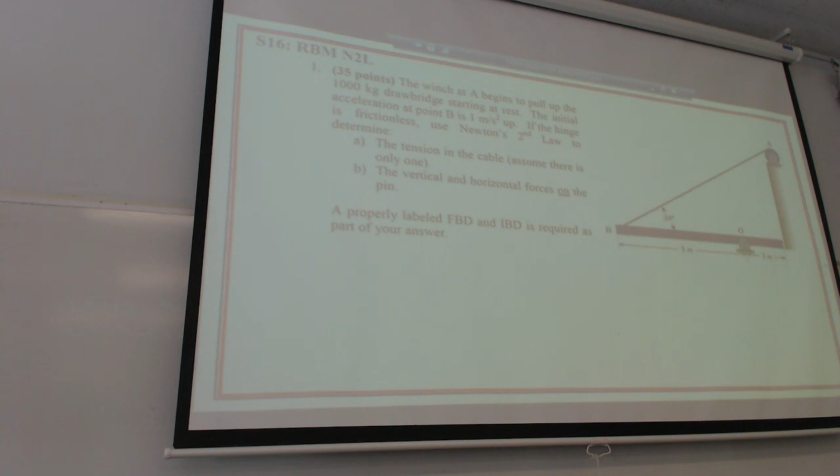So here was from spring of 2016 at Coast Guard Academy. That's a Newton's second law problem. Spring 2017, that was my last year at the Coast Guard Academy. I didn't write this problem, I can tell, because I would have made a prettier picture. Spring 14, that was a long time ago.

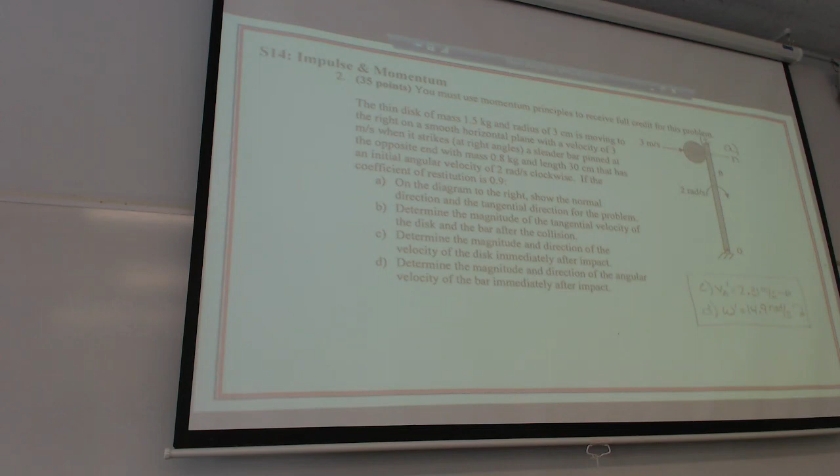Spring 14, okay, so this is a Newton's second law, impulse and momentum. You can tell right there, this is the last topic we just covered, right? Because you have a collision that's happening, and that does look like it might have been me. But not my handwriting, that's Alicia Garcia. This was mine because it was a silly looking thing. There's a work energy problem.

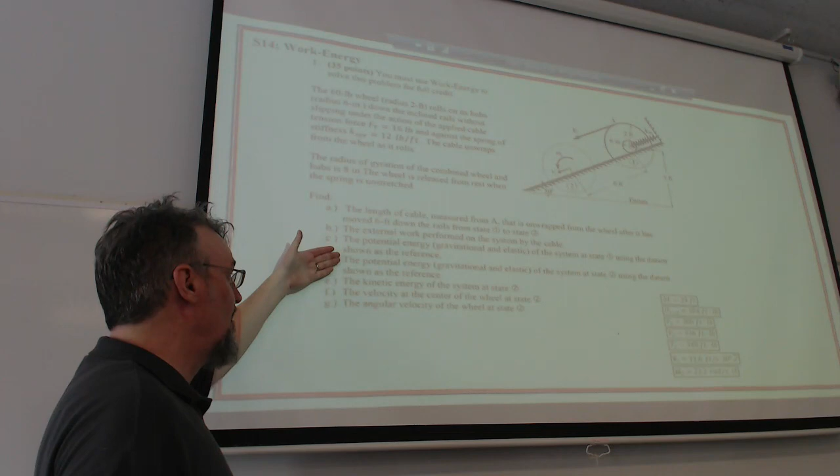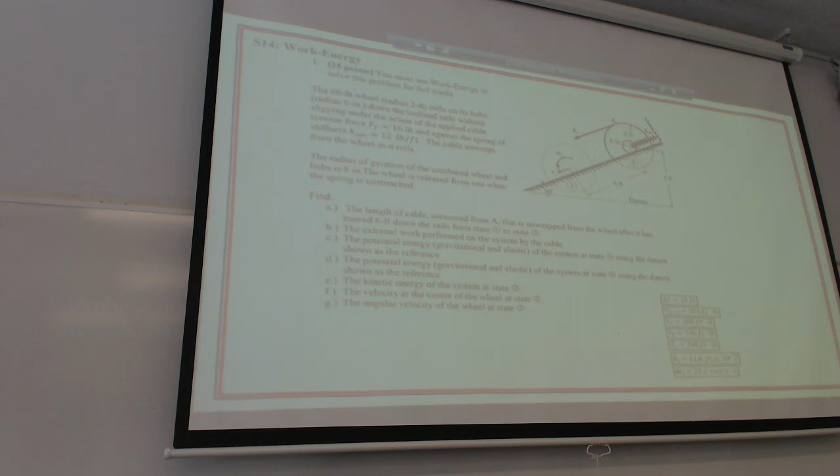I tried to make something complicated. Something I would change, I would no longer do this, but I used to: I asked all of these things to make it easier to grade, because I'd assign a point value to each of those steps. But I don't want you to just have me hold your hand and walk through it. So just keep that in mind when we're looking at this.

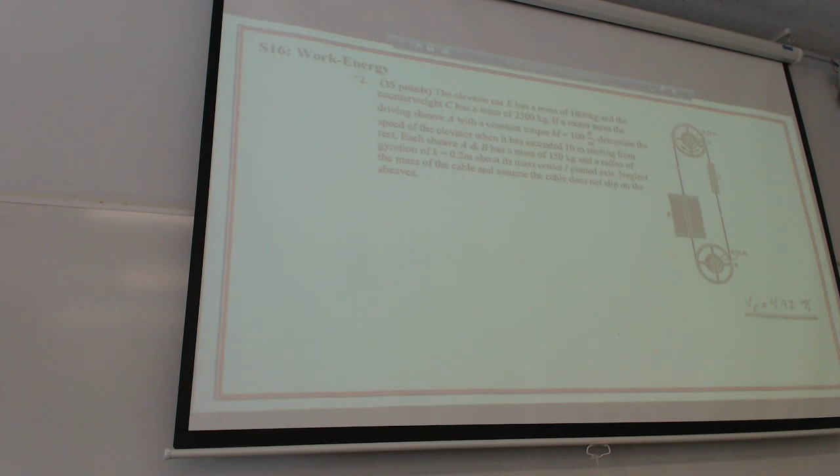My good friend Sean Munnis wrote this problem. It's like an elevator. It was out of a different book. Impulse and momentum. That looks kind of like me, but it's Alicia's handwriting. Work energy. This is definitely me. This is a ballistic pendulum, so this is really close to what we just covered. This is definitely me. So this is really various topics.

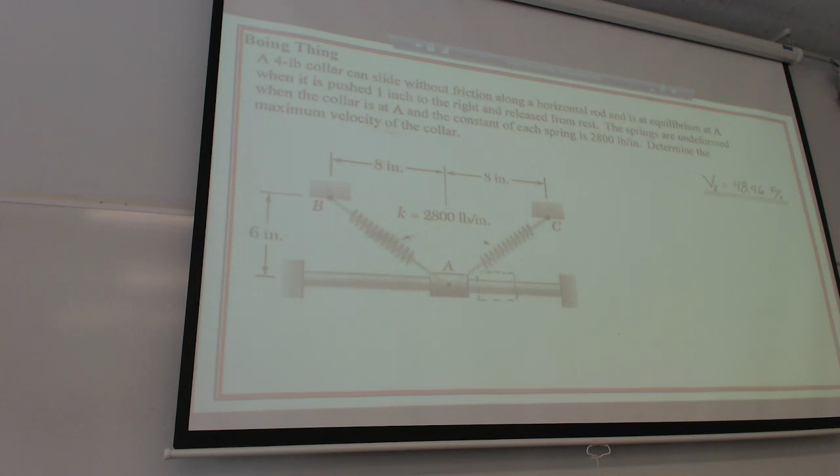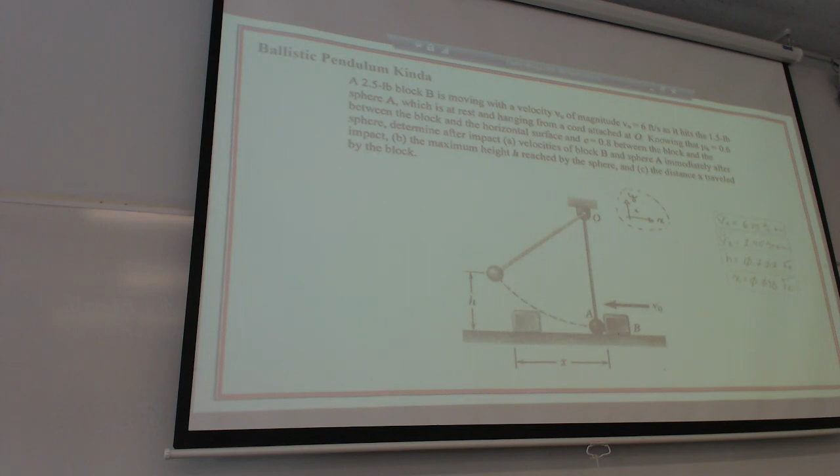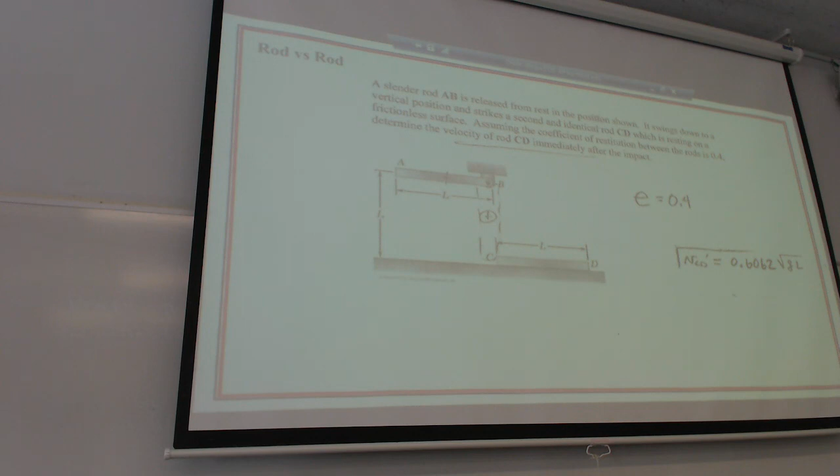There's only so many problems I can ask. So this was trying to get some more of that dependent motion stuff. This is with particles for polar coordinates. Here's a particle for work energy, because you can see the spring. Here's an acceleration problem. Here's a ballistic pendulum kind of problem. A work energy, oh, both Newton's second law and work energy. This is definitely an impulse momentum collision problem.

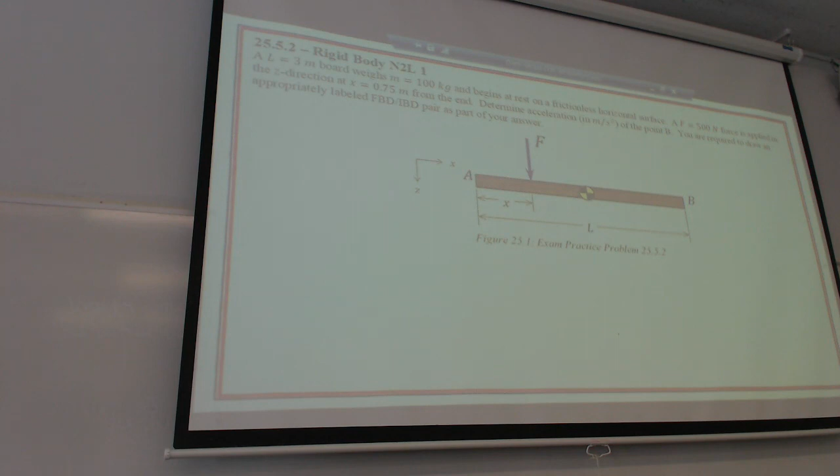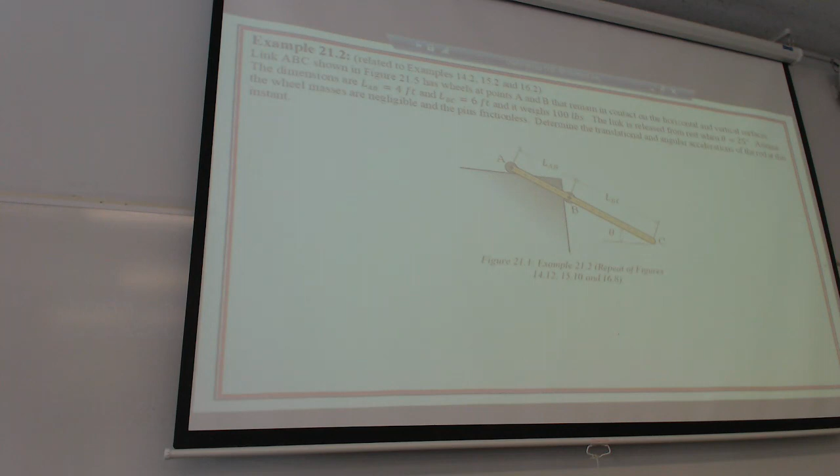This is a good problem because it is simple, but if you can do it, it reveals that you're capable of solving it. It does measure. If you can't do it, it measures that you can't do it. This is not a simple problem, so I probably wouldn't ask it. It involves a bunch more steps. This is also a really long problem. But this is almost identical to an earlier one that we just showed.

It's because it's not going between two different points. You want to do it instantaneous, and you can't do an instantaneous thing with work energy. It's got to be Newton's second law. Even with impulse and momentum, you really need to have some time elapsed. Although that's not 100% true, I'll take that back, because it could be a really small amount of time, as with impact.

Impact has a very small amount of time, but there are two separate points in time, before impact and after impact, even though we're talking microseconds in between. So that was one I put in there.

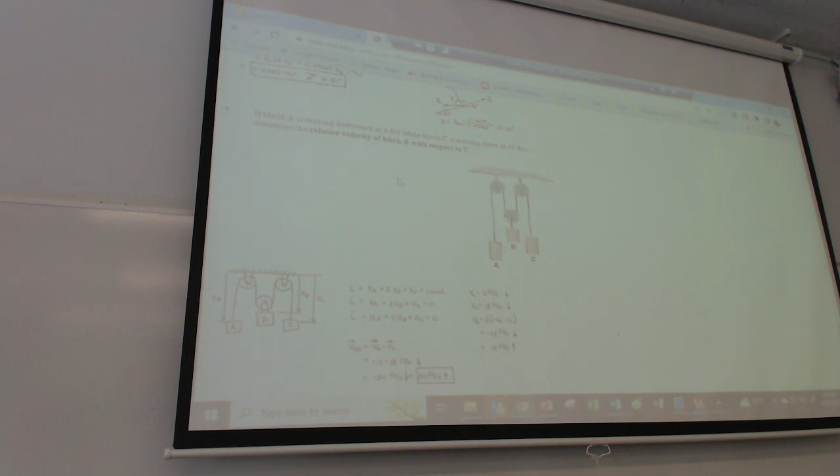What's nice about these is they're exam type problems, right? They're just long enough to have been done there. I do think the solutions that they give in here are a little deceptive in how easy they are to do, because they do them in very few steps, and I think you would want to break them up a little bit if you're a student to think through the things. It makes things look a little easier than they are sometimes. But anyway, that's some background and some suggestions, and I will open up the floor to your questions there.

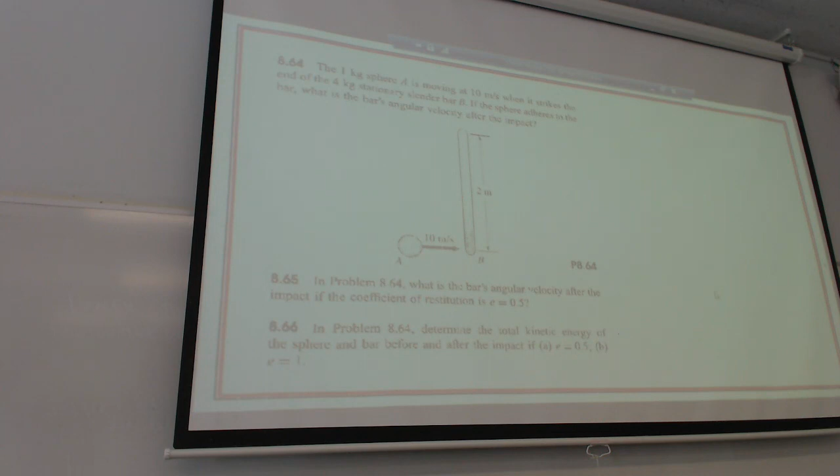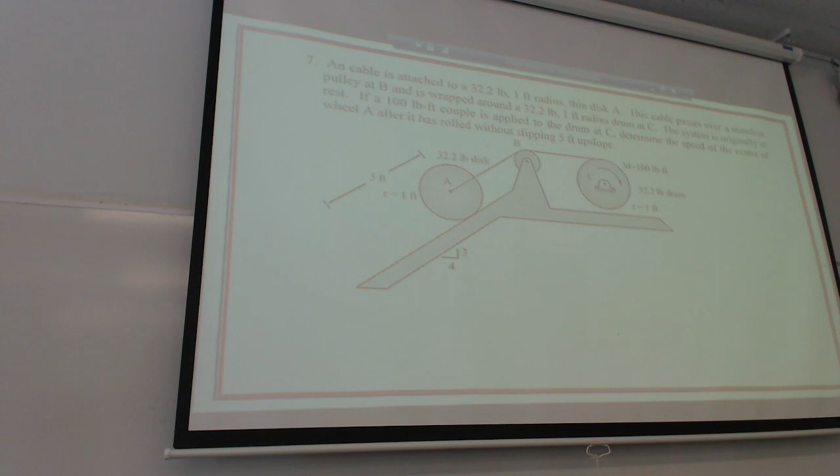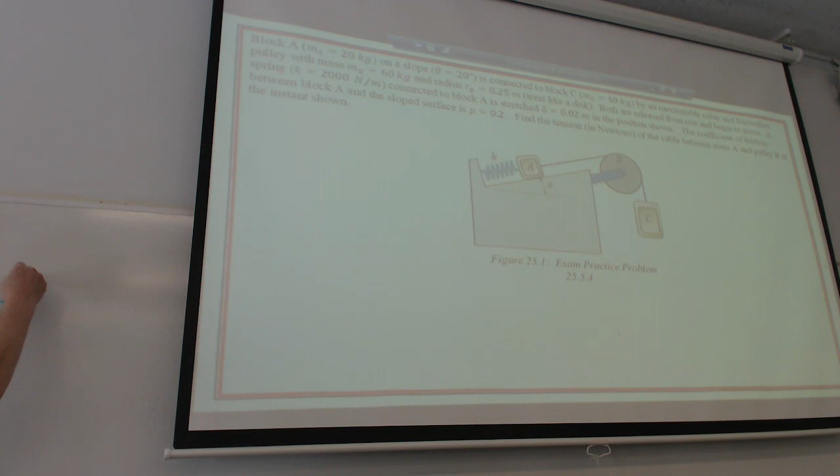Can we do one oriented around like Newton's second law? Okay. Setting? Let's see if this one is. Nope. 5 feet up the slope. Let's do this one. It's got a lot of stuff. This might be too long for an exam problem, but I don't know. I should know the answer to this one, but I don't think I do. So I guess I can't get it wrong. So, block A is 20 kilograms. It's going up with the slope, which is 20 degrees. Let me write this thing out. Oh, I think blue has to go away. I hope I can do it. All right, and then it's a 3D print this thing, right? Make it bigger.

Now that I have my 3D printer working again, I'm going to start making every single problem. I said I was going to do that, but I never got it working until just the other day. What was wrong with it? I don't want to admit what was wrong with it. Was it a SLS or FDM printer? It was an Ender 5. I don't know what those acronyms stand for. FDM is where they just build it by layer. SLS is when they use the ultraviolet light? No, okay, I don't know. It's a PLA, it's just a PLA. Well, it's supposed to be PLA. I bought off of Amazon what seemed like a really good deal. I had PETG instead of PLA. And I had a bunch of it, so every time I was like, ooh, I think it's a bad batch, so I tried the other one. We're talking 2 years' worth of struggling with this thing. By the way, I want to take that back, and that's recorded too. Right, great. Okay.

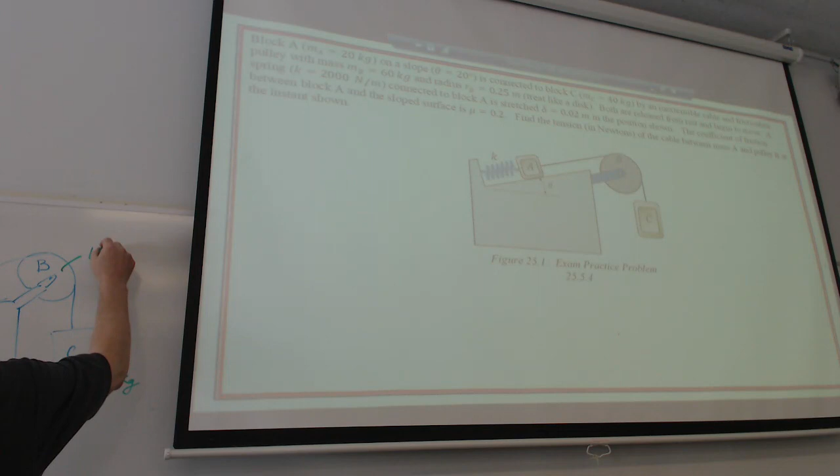20 degrees, and this is 20 kilograms. Is that right? What is B? Okay, no, this is 40 kilograms. And by inextensible cable, this is 60. This guy's large. And what's the diameter? Okay, K is equal to 2,000 newtons per meter. The radius of B is 0.25 meters. Where is it? Oh yeah, there you go. Coefficient of friction is 0.2.

And we want to find the tension. And we have to be specific though. Find the tension of the cable between A and B. So right in here. So FTAB. There you go. And then it says, del is 0.02 meters. Oh yeah. Sorry, thank you. So del is 0.02 meters. All right, so we could use the display for that.

All right, how to start this? What do you think to do to start? Find the force of friction on block A. FBDs and IBDs. Mm-hmm. Two great answers. FBD, IBD.

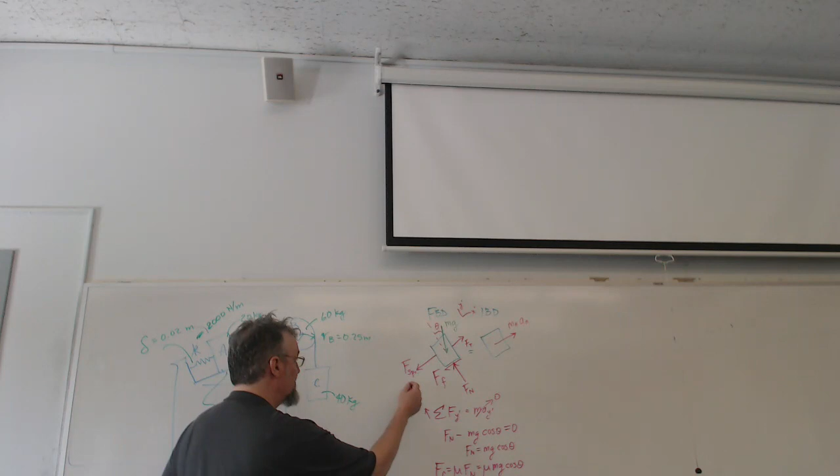So let's go FT, because that's the main thing we want to find. We're going to have minus F SPR for the spring, minus our friction force, which we can substitute, and then minus mg sine theta. I think I got everybody, right? So I got 4 things. And then m times the acceleration of A. Can we find this? Yes, that's just going to be FSPR right over here.

I'm going to make sure my camera can catch me. Actually, I think it was pointing up really high. I need to look and see what this looks like. Oh, I get it there. Yeah, right there. It's going to be an awesome video.

So that's going to be K times del. And our K, let's get some numbers in here, 2,000. And our del is 0.02. A smarter man could do that in his head.

0.02, 40. So 40 newtons. We could also, while we're here, get this one, right? So it is going to be 0.2, sorry, 0.2. Mass 20, 9.81, cosine 20. So I think I'm right at 36.87 newtons.

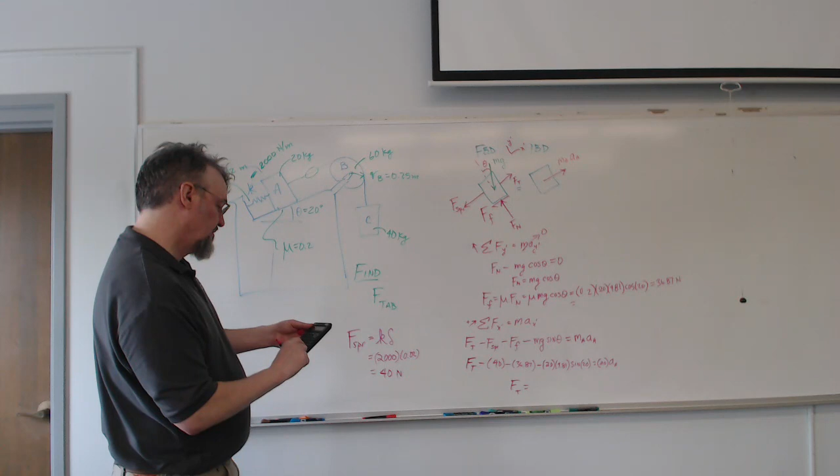So Ft minus 40 minus 36.87 and then minus 20, 9.81, sine 20 equals, I'll go ahead and write 20, an acceleration of A. That adds together 20, 9.81 times 20 sine, I think I got that right. So add that, and we're left with 144 plus 20 A. And we can call that equation 1.

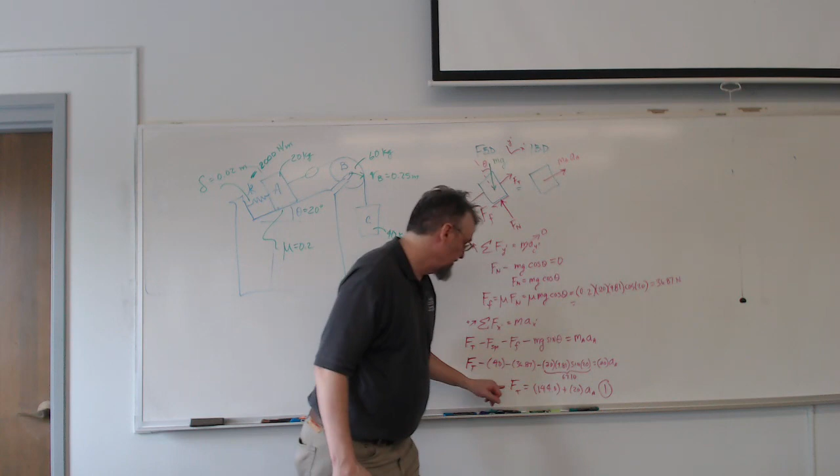All right, so we're marching through this thing. I think we got everything we possibly can. We have 2 unknowns. Here is our goal. We have to do something about this acceleration, so we need to start looking at the next thing. So I want another FBD. Look on the other side of the string, because I don't think I could write on both sides of this. Well, maybe here you go.

Have I told you the story of this? I always think of this. It was my first year at Coast Guard Academy, and I had an office mate. So we had a large office. We shared it together. He was a very nice man. He had a lot of little habits that drove me nuts. He used to take a pen and go click, click, click, all the time. It was on the other side of the cube, right? That drove me nuts. And he had this little vocal tick as he would talk. I think it was every 2 words, maybe sometimes every 3 words.

He'd be saying ah, he had this vocal tick that he had to say all the time. I'm not even doing it justice. It's more like a foghorn. I even sat through one of his classes. And I would tell my wife, and my wife thinks I exaggerate sometimes because I do. And I actually recorded him one day and played it back, and she was dying. I really thought you were exaggerating, but if anything, I was underselling it.

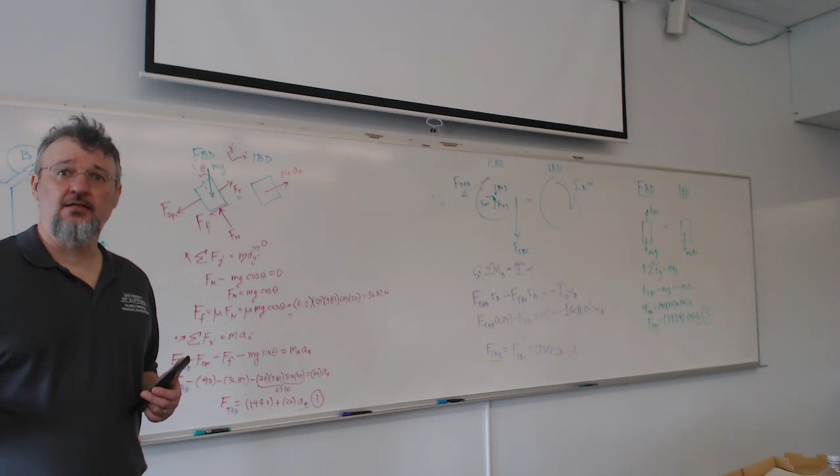But what do we do now? How do we proceed? Wouldn't alpha B be equal to AC divided by RB? Yep. So we have kinematics to the rescue. You got to remember, there's some simple kinematics, but a couple of other things, right? So we know that acceleration of C equals the acceleration of A, right? We could call that dependent motion if we wanted to. It's a simple one, but it's a dependent motion. So you can think of that as another equation, right?

So even though we had this as an unknown, we also had that as unknown. So really, this is another equation. It eliminates an unknown. And then, as Annabelle said, we also have that either one of these things is going to be equal to alpha B times RB. So you can see that's a fifth equation. So we could substitute into these, and I guess I'll do it right here in the middle because I spread it out all the way over there. I also set it up so that I could equate these two things. So I can make that, and then I could actually even substitute into here, right?

So what I'll do, this requires an extra step, but mathematically it will be easier. Algebraically, it'll be easier to approach it this way, to set them up to be equal to something, the thing I want to find, but then I'll be able to find the acceleration and plug it back into here. So my goal right now is to try to find acceleration A. That's just my approach to doing these problems, right? I find it's just an itty bit easier to organize things to make the actual thing we want to find the connection between these pieces. So mathematically, it's the connection. That's at least the way I think of it.

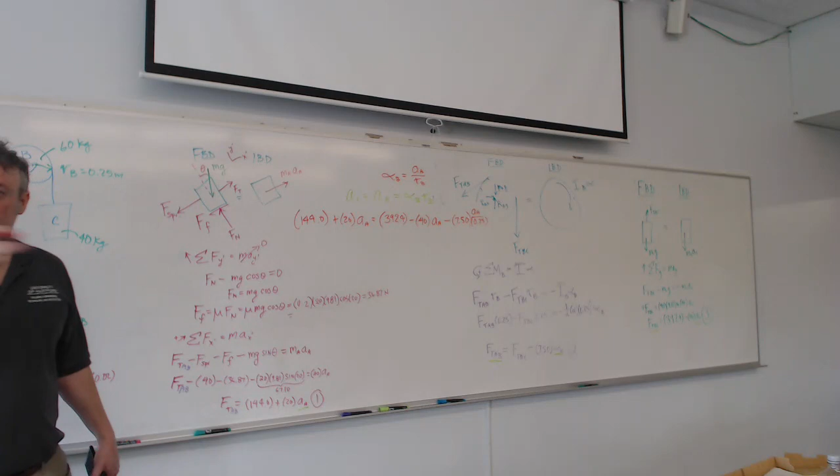Just even in relearning it for PhD classes and stuff, I was like, oh boy, man, I was resentful again. But this is my way of coping with it. It's my coping mechanism right here, to organize.

You take a look at this equation right there. I purposely, when I went through there, foresaw that this is the thing that I want, so I want to make one equation where I can focus on it. And then when I was working over here, I was like, this is one of my unknowns. I can write my equation in terms of that, and then take that one and make it equal to that one, right?

And then I also saw, well, this is also an unknown. So when I come back over here, I can write it in terms of here. So now my solution is to take this one, plug it into that one, and take that one and add them together. And then replace everywhere that I see an acceleration with this kinematics, so I can isolate that one thing. And practicing that will make it easy to do on an exam. You'll fly right through that step and get on to the next problem, and you won't run out of time.

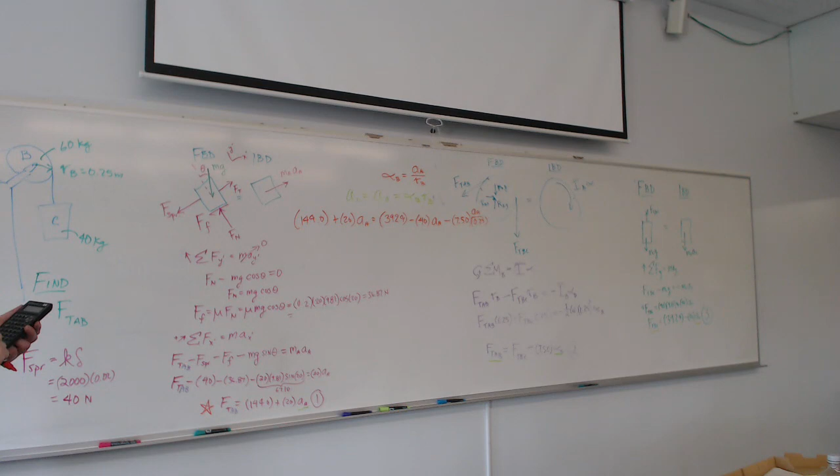So 144 minus 392.4. It's got me nervous, because if this were any larger, this would become a negative thing. Acceleration shouldn't be a negative. Don't you agree? Well, actually, it depends on what the accelerations are. We'll see in a second. Maybe. I'm nervous. My acceleration might be negative. Let's check it out.

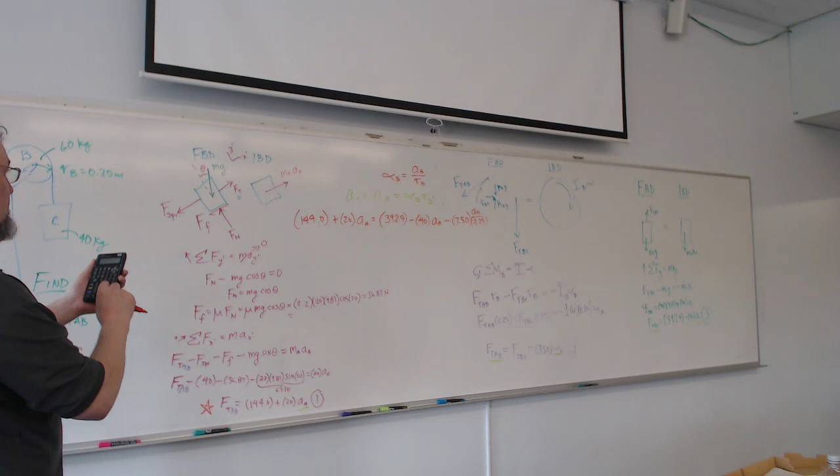No, I think we're going to be okay. It is negative, but I see what's going to happen, right? So I'll do my in-between step. I'm going to say a negative 248.4 right here. Flip onto the other side. This is going to be a negative 20 right here, so we'll have a negative 60 right there. And then I'm going to subtract out 7.5, divided, so it ends up being 30 right here, so I get a negative 90. Whew. All right, I was nervous there for a second.

So acceleration of A is in fact going to be positive, and therefore I get 2.76 meters per second squared. Can I do a quick little reflection of what happened here? If there were no spring, no friction, and no mass at A or B, what would the acceleration of C be? g. Yeah, 9.81, right? So it's something less than 9.81, right?

It's not accelerating as much because we have all these things that are holding it back. The mass of A is holding it back, but also a portion of it is going down that way right there. We also have the friction going on here, and the spring going on here. All of those things are making this less than 9.81. So 9.81 is the ceiling, and if we got something higher than 9.81, we did something wrong.

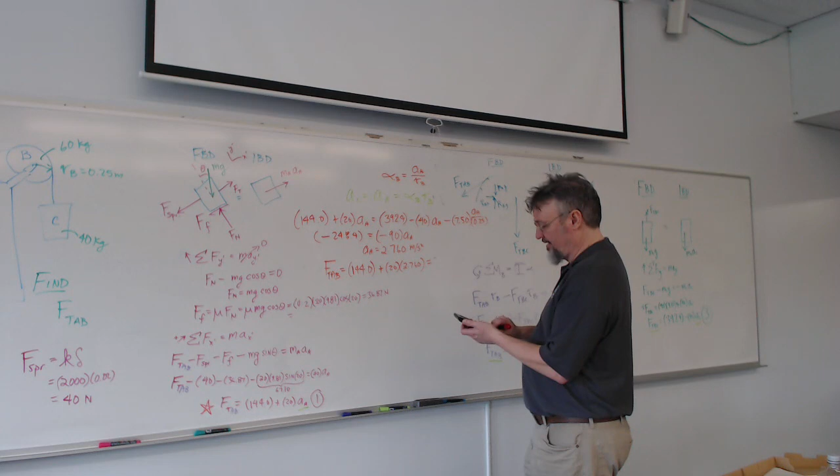No, I was just wondering, is that 144 or 1,440? It should be 144, I think. And where did it come from? It came from a collection of things, right? So it was 40 plus 36.87 plus 67.10, so 144 is presumably what those add up to, if I did it correctly. I got 199.2. Right here? For the force of tension in AB. Okay. So I probably just hit my calculator wrong. So yeah, that makes a lot more sense. I was talking and writing at the same time. Yeah, 199.2.

You would think when they were interviewing you to be a professor, they'd say, can you talk and write at the same time? Can you think and talk and write? No, can't. Something's got to give.

All right, so we had a request for Newton's second law. That's a Newton's second law. It's a tough one. I'm trying to remember. I had a student who had to do a make-up for an incomplete, and I think that was an exam problem I gave. How about rigid body acceleration? Okay. With the free-body diagram. Well, let's do something that will come in the test. Oh, you came back to me. I knew you would.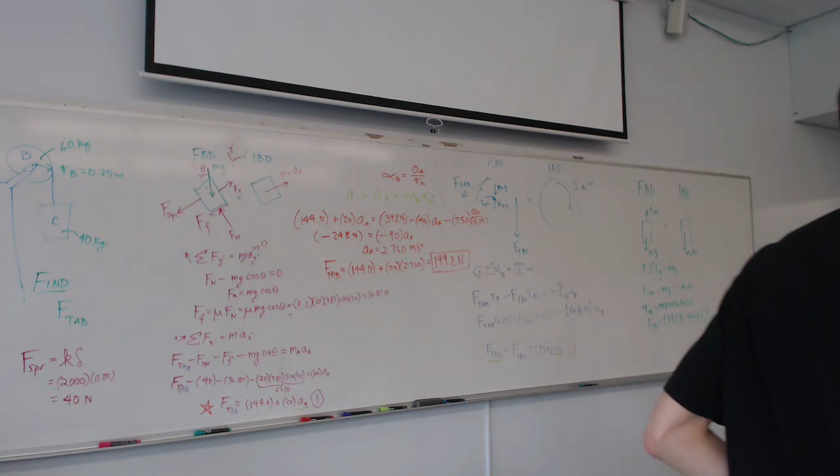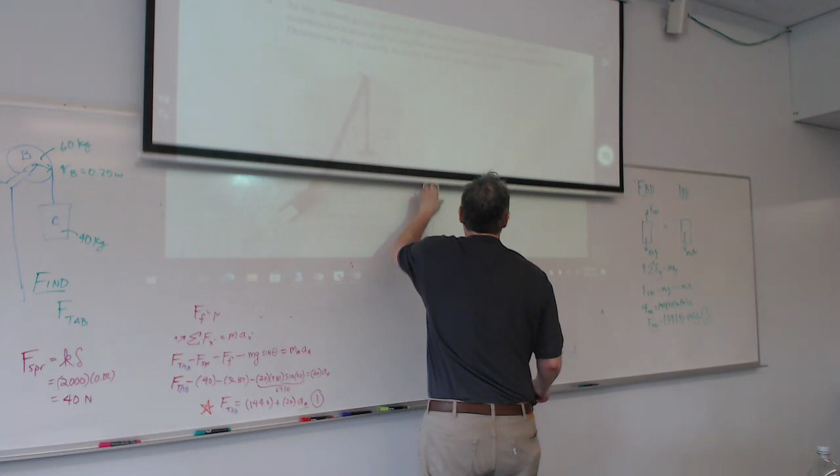We have a problem right there. Okay, so this was a Coast Guard Academy final exam problem.

Thank you. Have a great weekend. Oh, I got so much to do this weekend.

So at the instant given, member AB has an angular velocity of 3 radians per second counterclockwise and an angular acceleration of 2 radians per second squared counterclockwise. Determine the velocity at slider block C at this instant. So they cheated and tried to fool you into thinking it was an acceleration problem when they were just asking for velocity. What an evil thing to do.

They fooled me because I falsely remembered that this was an acceleration problem. But let's do this anyway as an acceleration problem and pretend what they really wanted was to find the acceleration of C. So, is there any way you could bump up the brightness on that? Oof, is there a way? I don't think I have those capabilities. I'm going to rewrite the thing on here anyway. So okay, hopefully that'll help. I don't know if these people can see that.

All right. So let's check out what our angles are. Look at this stupid 3, 4, 5 thing. I hate that.

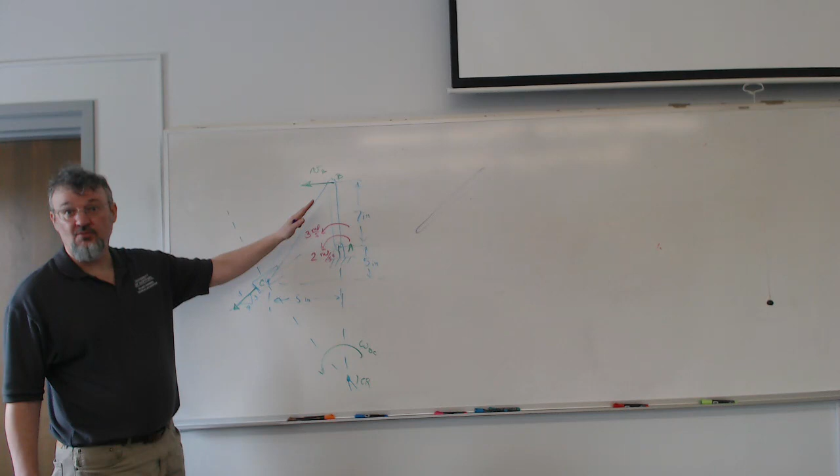First off, let me see if I can figure out what the angle of this leg is going to be. Oh, this is also one of those cutesy triangles, right? This is a 5, and this is a 12, so this must be 13. 5, 12, 13 triangle. I always hated those. That's actually real, right? Am I misremembering it as one of those standard triangles? I could be wrong, by the way. I'm wrong a lot. 12, 5, 13, yeah.

So I need some angles. Oh, I made it look like 45. This is a really bad habit. It's a bad trap to fall into when trying to figure something out, because it's nice to have as close as you can to the right angles on the thing. So an angle on here is going to be the inverse tangent of 12 over 5, and that's going to be 67.38 degrees, right in there.

And this angle of the slope should be the 36 degree right there, right? That's where you take 3 divided by 4, it's 0.75, and take the inverse tangent, and you get 36.87 degrees. I prefer doing that. So when it comes to this right here, that's going to be the same angle right here. Remember, that's not the same as that. So that right there is the correct angle.

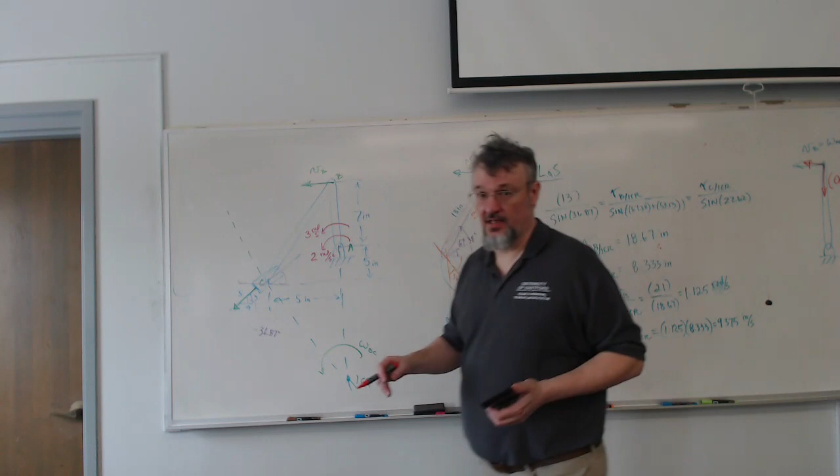I don't know if I captured all this on camera. Keep forgetting there's a camera there.

Should be 3 squared times, where'd you go, 7. 9 times 7 is 63?

He did actually just ask me that. That's what you could say. You know, I'm not sure if he's qualified to be my professor. He can't do... So calculator for? That's right. Or your abacus or your slide rule. No, that's not true. We already established I don't know how to use a slide rule. I could use an abacus, but I think it's just for adding.

I bet there. You know, here's one. Here's a side note. Here's like a completely unnecessary thing to include. I had this like vague memory of this advertisement. There's like this craze that was hitting America called Chisenbop. It came from Asia. I think it was Japan. It was Korea. And little kids could do all kinds of math faster than people could solve it with the calculator by going like this right here. This right here. You would learn, and you'd be able to keep track of stuff. They could do division, multiplication. I think they could even do square roots. Just by going like da, da, da, da, and they get the answer.

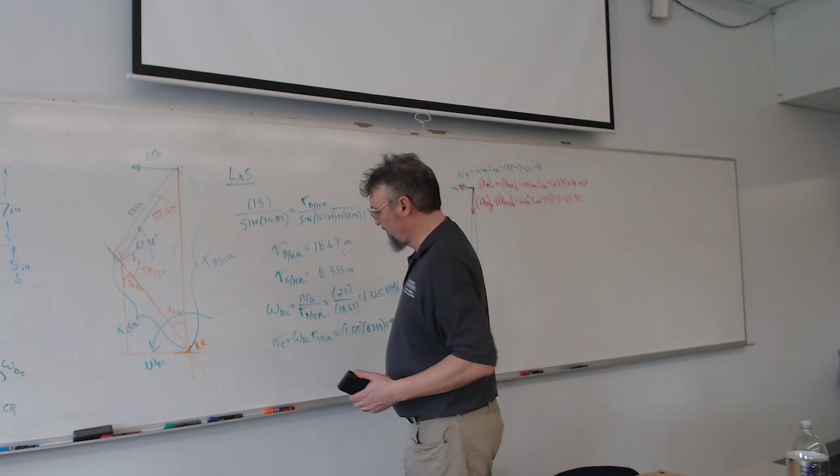So you had 2 times 7. Ooh, 14. Gotcha. Inches per second squared. All right, so now we go to the difficult one to do. This is the 3 diagram method, and I think that's what Alejandro was referring to, as opposed to the, you said 3 body diagram, so there's a 3 body diagram, and then there's 3 diagram method, and we had them interspersed, right? That's okay. Maybe I'm going to change the thing. That sounded better. I like what you said better than mine.

Want to try to avoid the 45-degree angle trap. So Jess, flip it. There you go. Okay. Red is a good color for accelerations. All right, so here at the top, we know these 2 values. We know that value, and we know this value. We have actual values for it. We call it ABX, maybe ABY. And we know this direction.

And having seen these already, we have a strong suspicion. So we can make a guess. It's a hazardous guess, but we can make a guess that the acceleration of C is going down that way. We could pick the other direction if you wanted to, but I have a strong feeling that this is going to be the way to go. And in terms of angles, that right there is the angle we want, right? It's the same as that angle. The same as that 36.87. We agree?

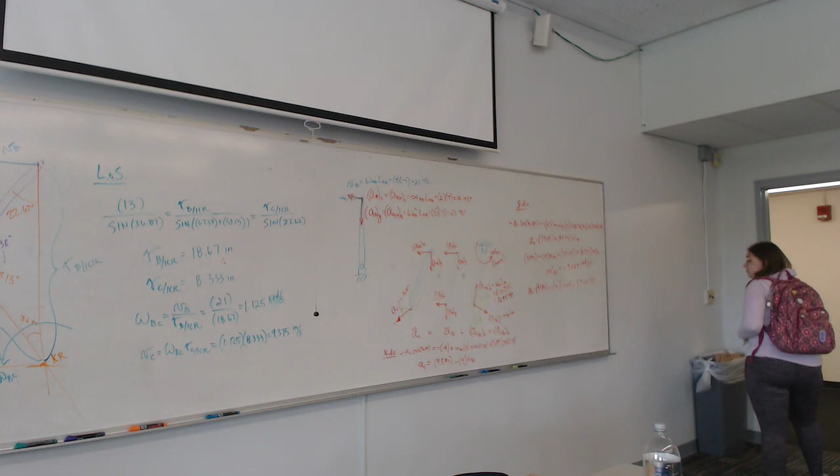It can be quite confusing sometimes to try to rationalize what's going on, but it's also so easy to make mistakes with the signs and math and that kind of thing along the way. This is a really challenging problem. It's too challenging to really ask for an exam. It took us 35 minutes. That's a long time, that's professor time, right?

I usually try to multiply it by 2, this is the way you think of it in terms of, okay, this is what you could expect a student to try to do. Sometimes 2.5. Get that wrong a lot. It's difficult to judge. But it's also trying to encourage you to try to find those places where you can speed things up.

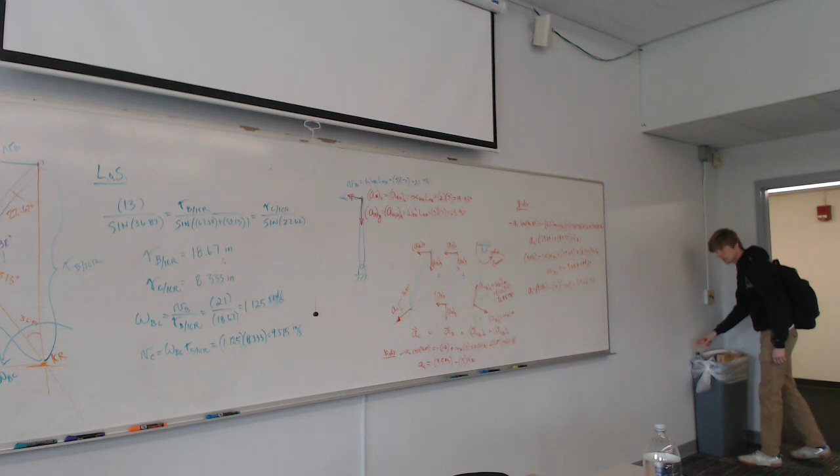Say again? The FE exam? Yep. What kind of questions would you expect on the FE exam? Usually, I say if you take the number of questions and the total time given, I think it comes out to about 2 minutes, like 1.9 minutes per question.

So when giving a FE prep class, I usually tell people to divide questions into 3, and it's all about the individual: I could do this in 30 seconds or less. I could do this in 3 minutes or less. I have no chance of answering this question in under 3 minutes, right?

What you want to do is go through and answer all those under 30-second questions as fast as you can. And never psych yourself out, you have to keep that positive attitude. And then after you've done that, go back through and do all the 2-minute questions, I usually don't actually say 3-minute questions. Usually, I think 2 minute. I have all this written down.

And then the others, make sure you have spare time to go through and whittle down, like, okay, is this even in my area? Have I any clue on how to do that? And the rest just put in numbers, right? Don't wait to the end to just put in guesses.

Generally, how many questions? It's written down on the FE exam. Not ours. Okay, the FE exam, I want to say it's like 110. If you want to know more things about the FE, there's a lot of information on the NCEES. NCEES is the National Council of Examiners for Engineering and Surveying.

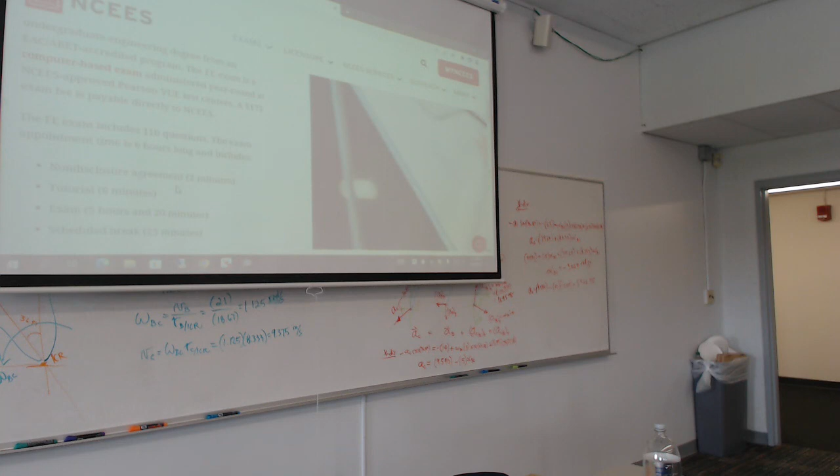2.9 minutes per question. They give you sample exams in here, but I would highly advise that you buy some preparatory materials and do some review, maybe even enroll in some type of online class. There's a ton of stuff. I've been talking since I got here about how there was only a civil engineering FE prep class, not a mechanical one, and we needed a mechanical one, because it's a really good thing for your program to encourage your students to take the FE.

It's really smart to take it when you're a senior in college and not wait, not procrastinate, because it's over a wide range of stuff, and in your career you will narrow down very quickly to a range of things that you learn a lot about and are comfortable with, but then have purged those little memory things like fluid mechanics and thermo, if you're a structures guy, and vice versa if you're a fluids guy. So it isn't a mandatory thing for a mechanical to have a PE license, but it sure does

look good. Did you go to the thing on Wednesday? Yeah, somebody actually gave me, I took a scan of the list. I don't know what I said I was going to do with that, you'll have to remind me. Brownie points, because there were brownies there, so you got those brownie points already. I'm joking around, but I'll think about something.